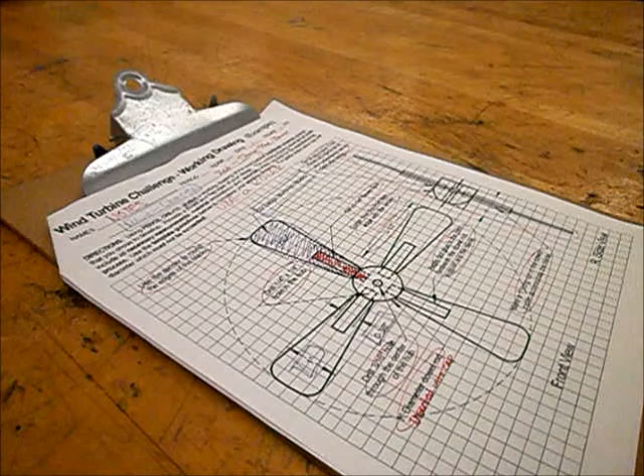Hi class. When we left off, we were learning about wind turbines, and we left off designing our own wind turbine rotor. So today I'm going to take the time to show you guys how to build the one that was shown to you in the example. Let's get started.

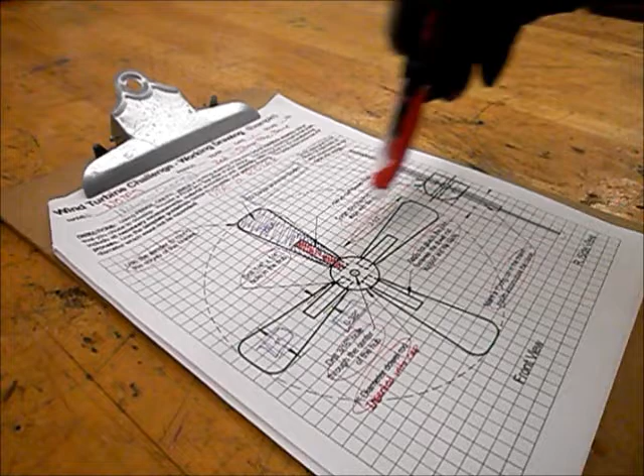Alright, so we're going to learn how to turn these two materials into this hub. It's going to have a center hole, which is 3/16 inch in diameter, and the side holes, which are 1/4 inch in diameter, which will serve to hold the rotor blades.

So here we go. Grab your PVC cap and your dowel rod, probably about this size. You might be able to get a longer one, but enough so that you can grab hold of it. Take the cap on top, right there, and grab a mallet and hammer it in. Get a couple nice hard hits, making sure it doesn't come off. It's nice and tight and fit in there.

Okay, once you got that, we're going to move on to the belt sander.

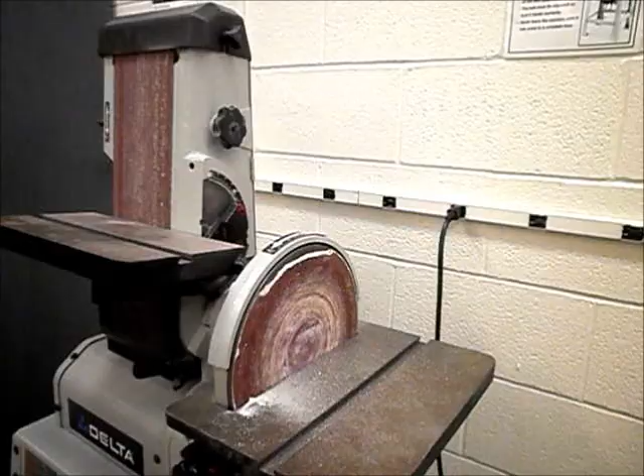Alright, so we're now here at the disc sander. The disc sander has two pieces, the belt and the disc, and there's a label on the side which tells you which way it rotates. The disc rotates counterclockwise, which means you want everything you're sanding to be on the left side. That way, when you're sanding, things are pushed down towards the table. If you put them on the other side, it might cause the disc to lift up the material and hit you in your body, so you want none of that happening.

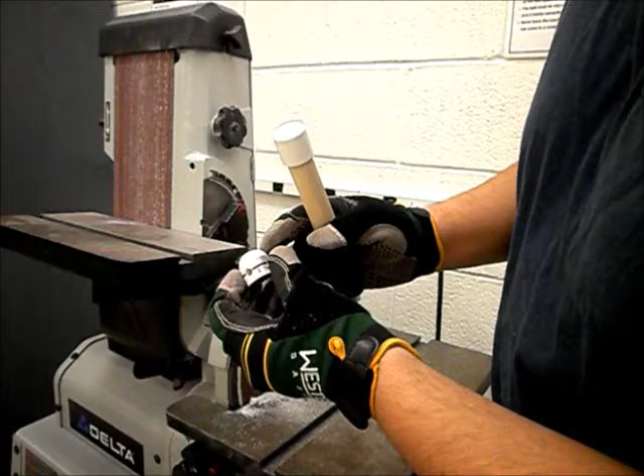I highly recommend using the disc sander instead of the belt sander, because you'll get a nice finish on the hub. So what we're trying to do here is sand all these edges and make a nice dome shape. That way it's a lot more aerodynamic. See that? So we're going from this to this on my left hand.

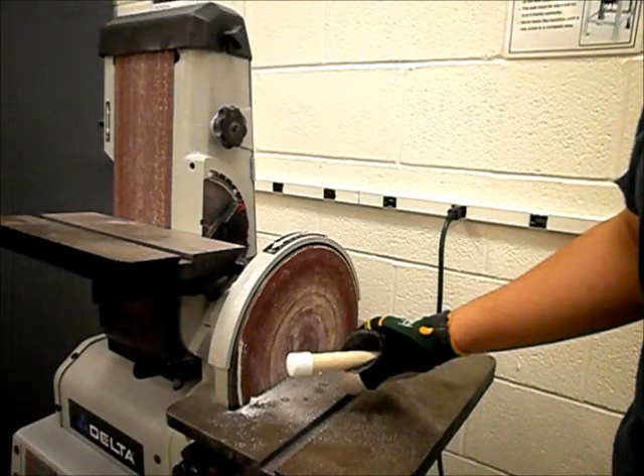Okay, I'm going to show you a quick demonstration of how to do that. Let me just get the camera to the right focus, and we'll continue on from there.

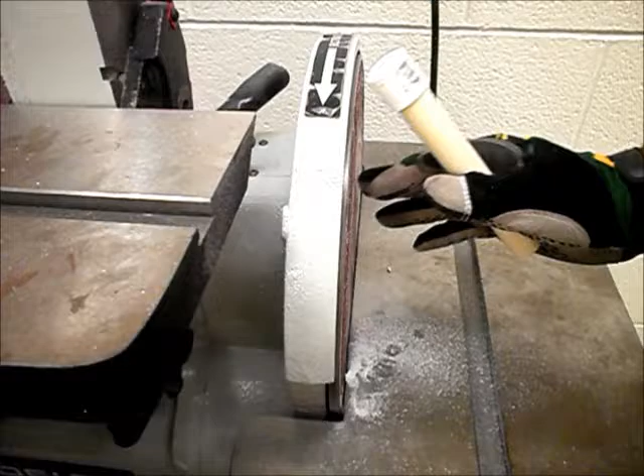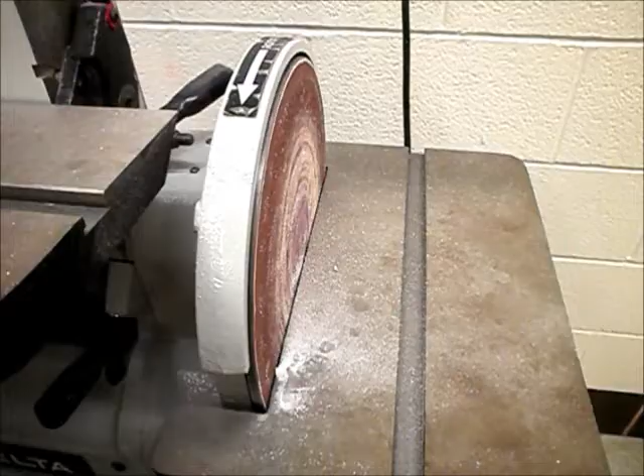Like I mentioned before, there are two places you can sand things: the disc and the belt. There's the belt, and here's the disc. There should only be one person at the station, nobody else, just you, the one operating the machine. If you're working with a buddy, make sure they're standing right behind you, watching what you're doing, so they're checking your safety rules and procedures. If you forget any of the safety rules and procedures we talked about, you may also find them right here, listed on each side of each machine.

Remember to wear your safety glasses, make sure you're not wearing any jewelry, and your hair's tied back. Again, we've gone over the safety procedures, and we'll do it again in class. But let's move on to this tutorial.

So going back to this, what you want to do is turn on the machine, let it get up to speed, and once it gets up to speed, you're going to hold it and twirl it around until you get a nice dome shape. Let me just show you guys.

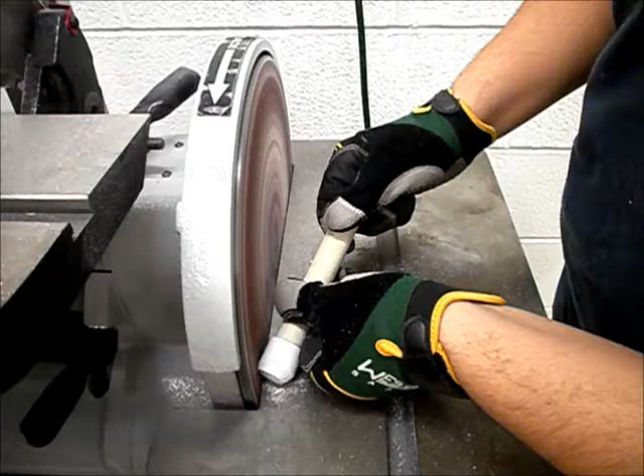Try not to push too hard, okay? Otherwise you'll tear away too much material. Yeah, it's coming along pretty nice, okay?

Here we are. The top, we're going to have a nice flat surface on it, so we're going to try to make that.

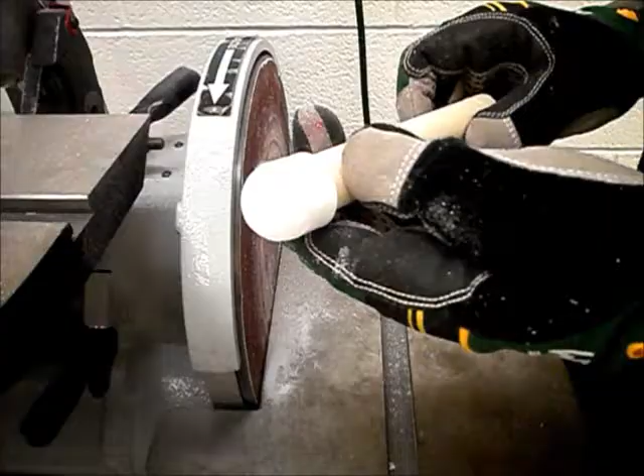Wait till the machine stops before you leave. Alright, and that's it, look at that. It's nice and even. Try not to shove it in there, otherwise you'll tear away all the PVC plastic out of that, and you don't want any of that, okay? So that's it for the disc sander.

Now we're going to go and remove the cap from the dowel rod, so that all we have is this short piece right here, okay? Alright, let's move on.

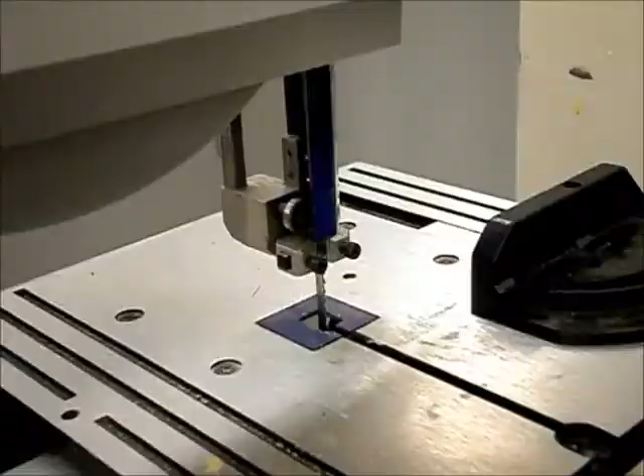Alright, so I understand a lot of you guys haven't used this machine before, but this is called a bandsaw. So there's the switch, and right there is the blade.

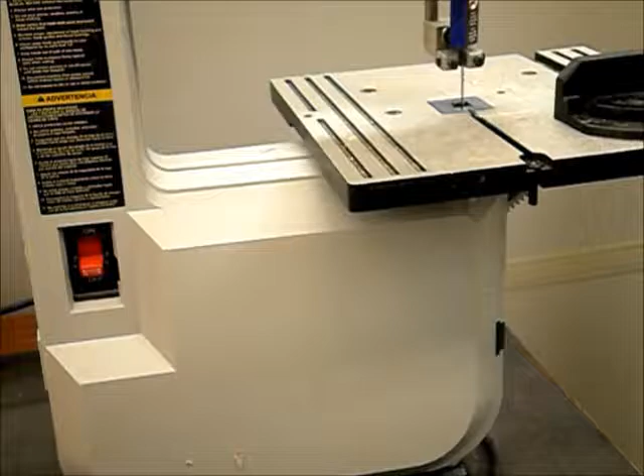Okay, let me open it up for you guys so you can see it. This is something you guys shouldn't do - I should do it in case it ever breaks or needs replacement.

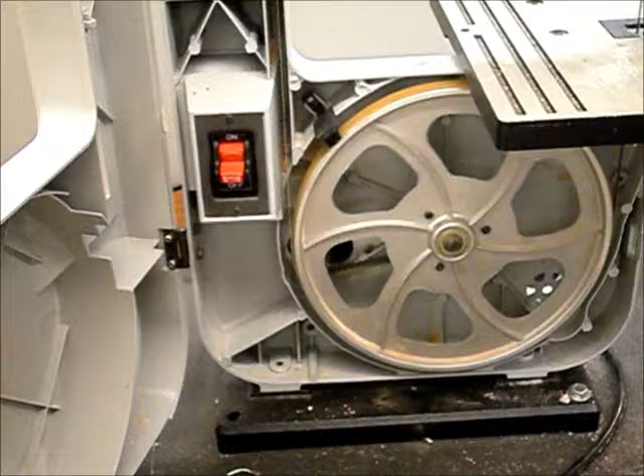There's the inside of a bandsaw. It's called a bandsaw because it has a band inside that has teeth. It's got a set of teeth that cut material and it rotates in a clockwise direction. I'll talk more about that in class, or one of the other teachers will explain the functioning and cool stuff about the bandsaw.

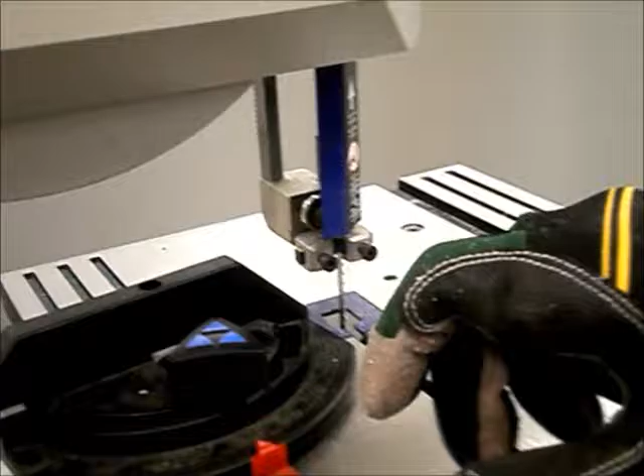This machine will already be set up for you guys, so you don't have to tweak it or do anything. All you got to do is understand that this is the slider, this piece right here. Why is it called a slider? Simply put, there's a rail right here. You put the slider on it, and look at that, it just slides along.

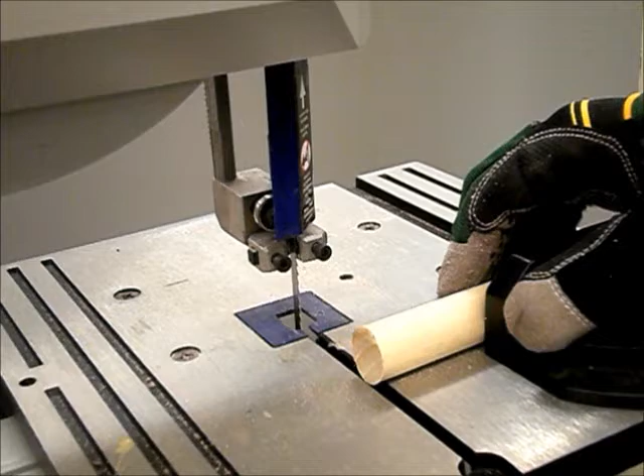So here's how this works. You're going to put your piece of material - this is just a practice one so you guys can see how it works. The piece of material just sits against the guide. Let me see if we can get a better shot there. See that? My fingers hold it, and now I can slide in and out accordingly so that the piece touches the blade when it's turned on and it cuts it.

Let's see, I'm gonna turn it on. That's the sound it's gonna make before you start cutting. So here we go. You can slide in and out this way, but you're always holding on to the piece up against the slide. Let it stop before you remove any of those pieces. And there we go, and there you have it.

Okay, here's the cap that we made before - well, the assembly, I should say. I haven't really cut out the hub yet.

But what we want to do here is go to the bandsaw. I'm going to try to line it up as much as possible, the cap to the blade - as much as possible, but not too close, okay? Sometimes the blade can cut more than we need to and not exactly at the right spot. But we want to cut at the neck.

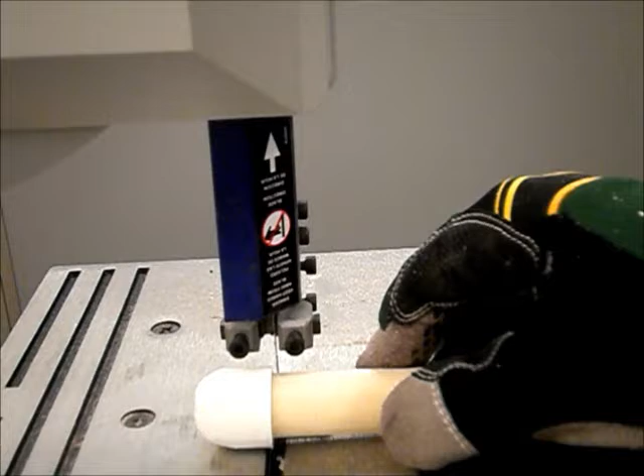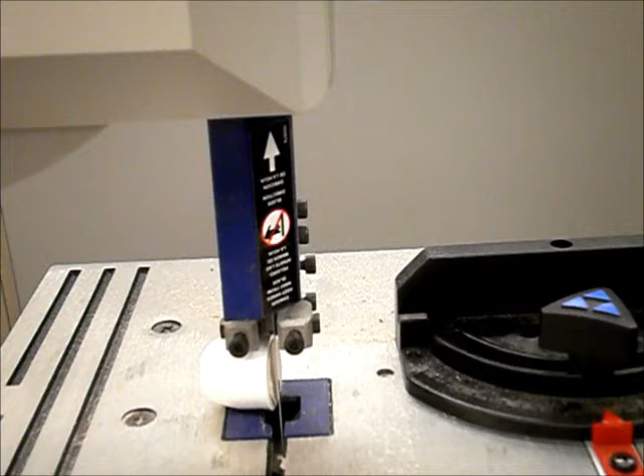So here we go, I'm going to pull aside, start it up, slowly move it, okay? Alright, so if you did it right, all you should have is this guy right here. See that? I didn't cut too much of it, it's just at the right spot. I didn't cut any of the PVC plastic.

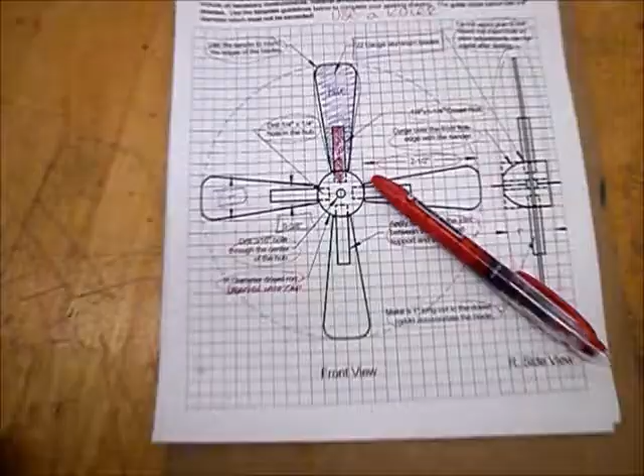Alright guys, so here's the next step. We're going to make marks so that we know where to drill the holes. According to your drawings, we had the center hole, which is 3/16 of an inch. We need to mark the center of our hub right in the middle.

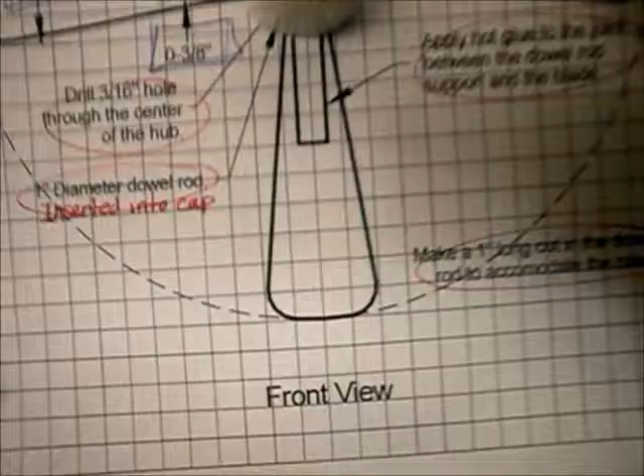It's going to be kind of hard to do while holding a camera, but I'm going to try. Okay, I'm going to make a little dot. I'm going to do that - double check. Just a small dot in the center.

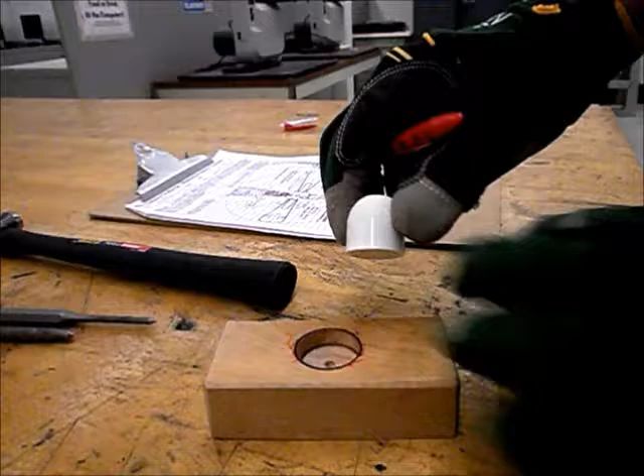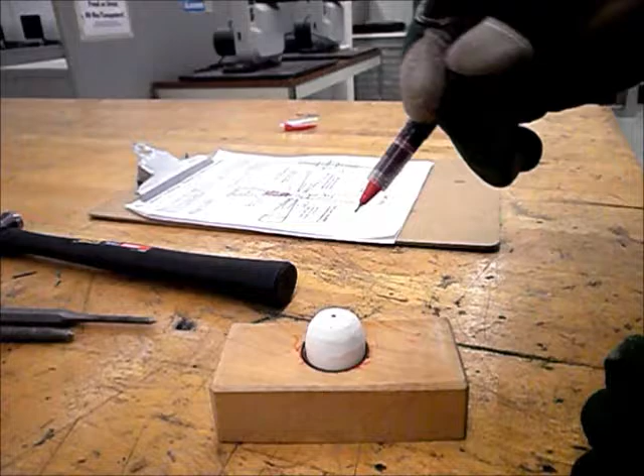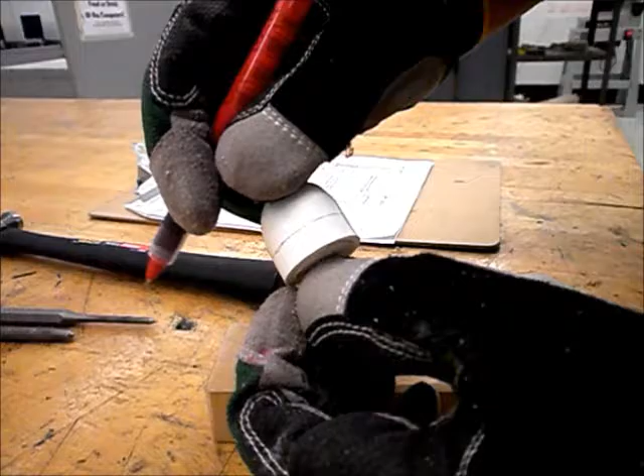Here I have this wooden piece that is pre-made, courtesy of Mr. Nelson, and all we got to do is take our cap. It's been sanded down so that way it lays nice and flat inside here. See that? I'm going to put the pen right up against there, and that's going to mark the center line where my 1/4 inch holes are going to go. See that? Line goes all the way along that.

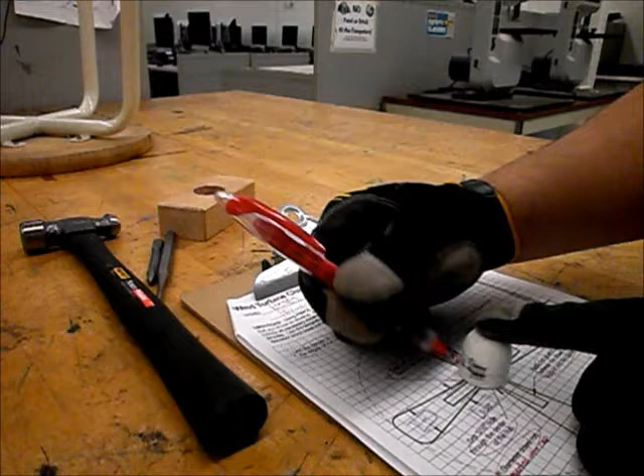So I marked the center line, so you remember. And now we also need to mark where we're going to make the center marks for the side holes. Come to your template - obviously mine, the one I'm making, is a 4-blade, so it's really simple to do. I just got to lay this guy on top of the template, nice and center. Grab my marker, make a vertical line, matching up to that. Vertical line here, vertical line on this side, and on the back side.

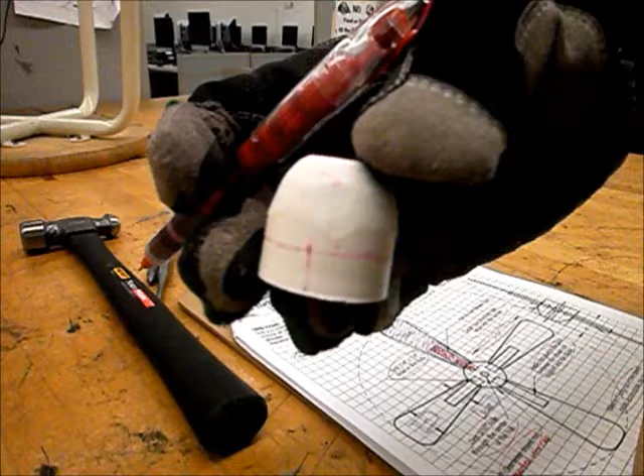For those of you who are making 3 blades and 5 blades, I will have a template ready for you, so that you guys can actually just mark it and it's ready to go. What I might even have is clean out these blocks, and I will have stickers with arrows pointing to where you should mark the little tick marks, so that you know where to center the hole. So little tick mark - yeah, so all you'll have to do is go like this, make your little circle all the way around, and just mark all your center holes.

Okay, so now that it's marked, we're going to make some pilot holes that will help guide the drill bit into it so we can make the holes.

Okay, so I'm going to put the dowel pin right at the center, and I believe that's the center that I marked. It's a little smudged. Actually, I'll use the short dowel pin. It's hard to match it up. Get a couple hits with the hammer, and it should make a little dent in there that's right at the center. I'm going to use this one just to make sure.

Alright, be careful not to rub the marks, otherwise you'll smudge it and you're not going to get the perfect center marks. This is a little tough, you're going to have to hold it. Make a little...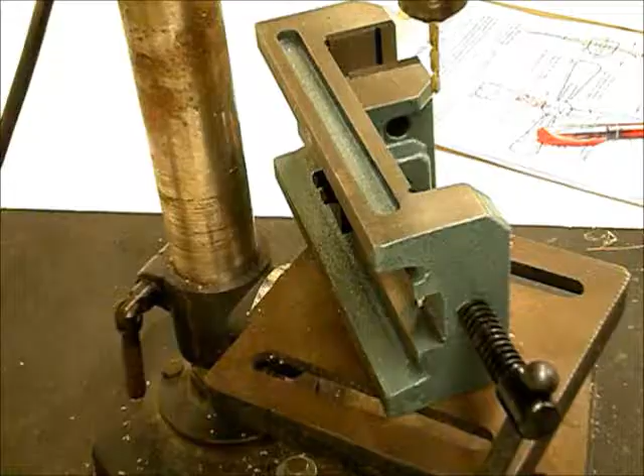Alright, so here we are at the drill press. Now again, if you don't know what the safety rules are for the drill presses, we reviewed them in class, but also if you forget, they're on each side of the machine. Make sure your safety glasses are on, make sure no one's in your work area. If you're working with a partner, make sure they stand behind you and cause no distractions to you, and that they're checking for your safety and their safety as well, so you're checking out for each other.

So here we are. What we have here is a table vise. If you turn it clockwise, it closes down, see it moving. If you turn it counterclockwise, it opens. Clockwise closes. So as the old saying goes, lefty loosey, righty tighty.

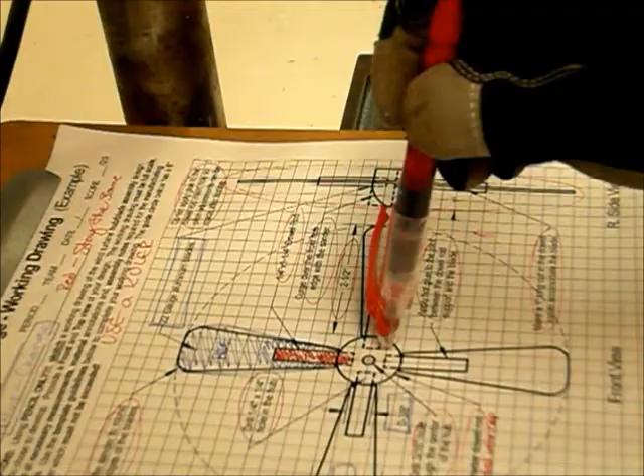This drill press is already set up for you, so you guys can make the center hole. That's 3/16 of an inch. It's marked down for you in your drawing.

So here we go. What we got to do is take this guy, take the cap, and we're gonna turn the vise right. Make sure that this guy, the cap, is touching up, right up against the wall of the vise.

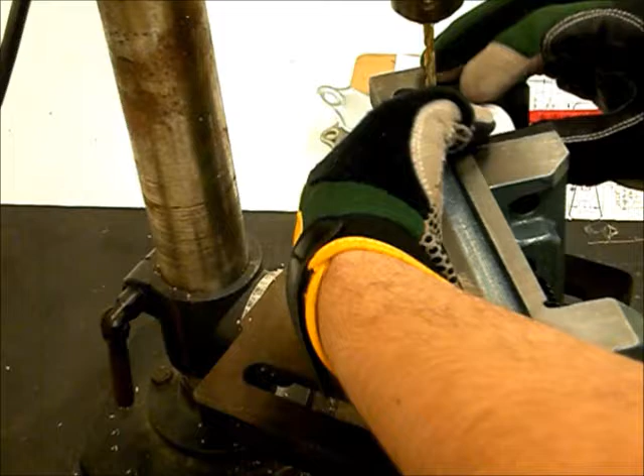That's about right, and squeeze down kind of nice and tight. You can have a teacher check to make sure it looks right and nice and straight, because some people like to put it crooked. So like this, that's a no-go. Make sure that little dot is facing straight out, as straight as possible. Okay, close it.

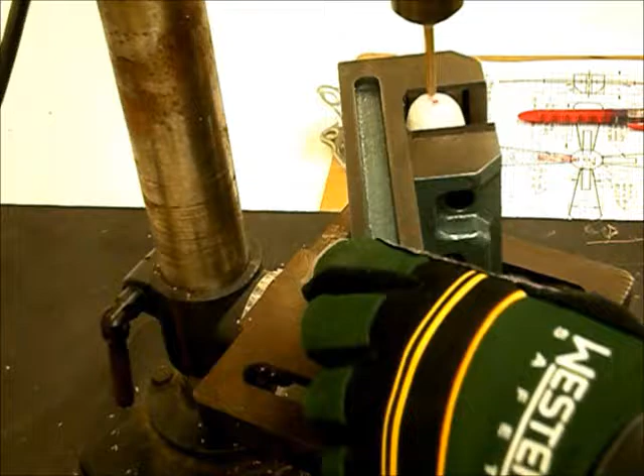Alright, I'm gonna turn it on, and watch carefully what I do, because I gotta make sure that I bring this down and up. It's gonna have to go all the way through. Just doing that motion slowly. This ensures we get a straight hole through the whole cap.

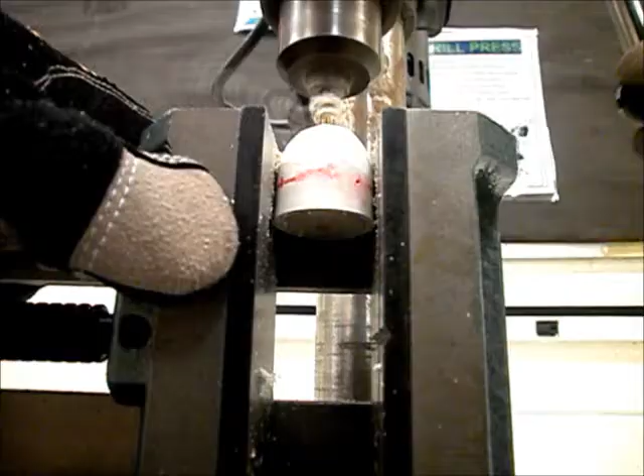Notice I'm holding the table vise correctly all the way through. Wait for the machine to stop. Clean it up a little bit. Look at that, right down the center.

Looks pretty good. Alright, so now let's move on to making the 1/4 inch holes on the sides.

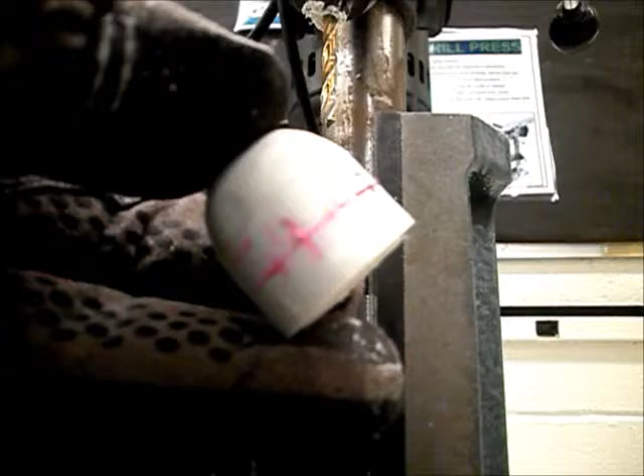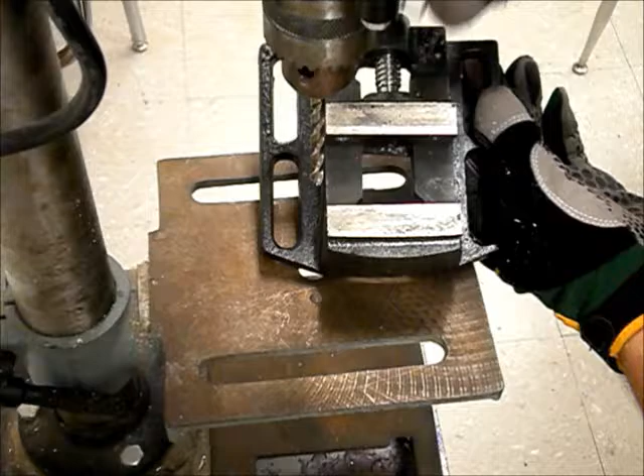Alright, so here we are making the 1/4 inch holes. Make sure the workspace is nice and clean. What I'm putting on here is a table vise, different one from the other one. This one is smaller, to lay the cap nice and flat up against this flat piece right there. Nowhere else, not in the middle, not on this side, just one of these flat sides.

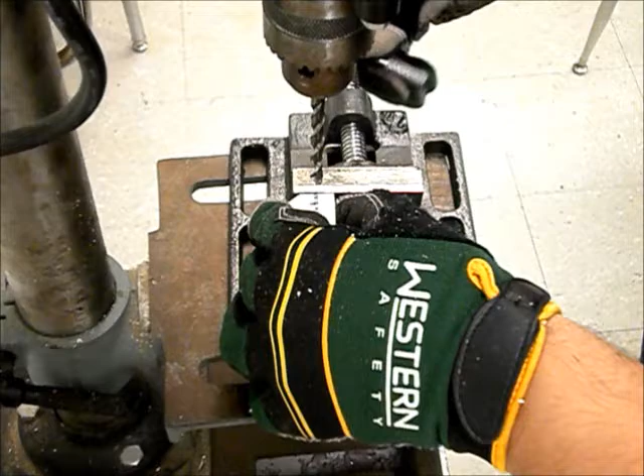The way this table vise works is the same way as the big one. Lefty loosey, righty tighty. Watch your fingers as you're closing it down. You got to make sure that the first of the marks is facing up. Alright, that's nice and tight.

And we're going to try to line it up. Make sure that when you hold down the table vise, you're holding it down on the table, not pushing it sideways, otherwise it'll slide and you'll bend the drill bit, and also you won't get the right hole. Line it up.

And how deep should you go? Well, it's a 1/4 inch, but I already set it up for you, so you only have to go down a certain depth. These little nuts will actually stop the drill press from going any farther than it's supposed to. So it's already at the right depth, you don't have to go any more, any less.

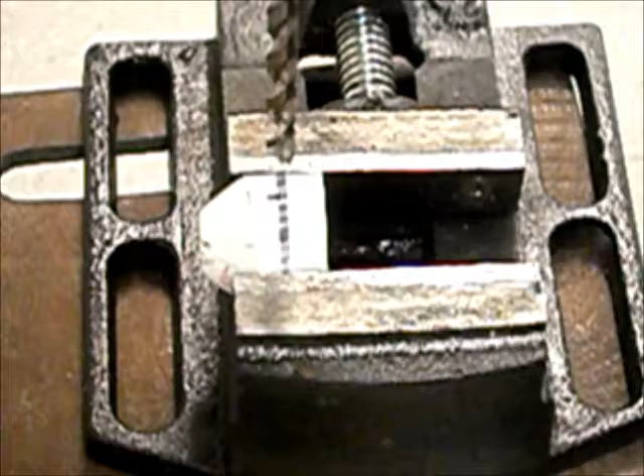So here we are, I'm going to line it up. And we're going to turn it on and let it go. Nice and easy. Shut it off, wait for it to stop. Loosen it up, bring it down to the next one.

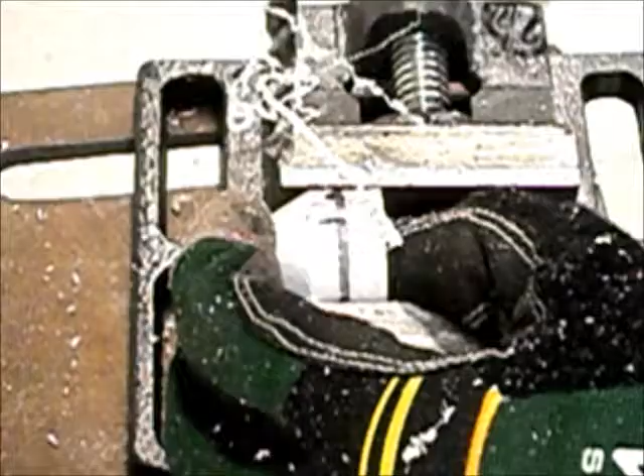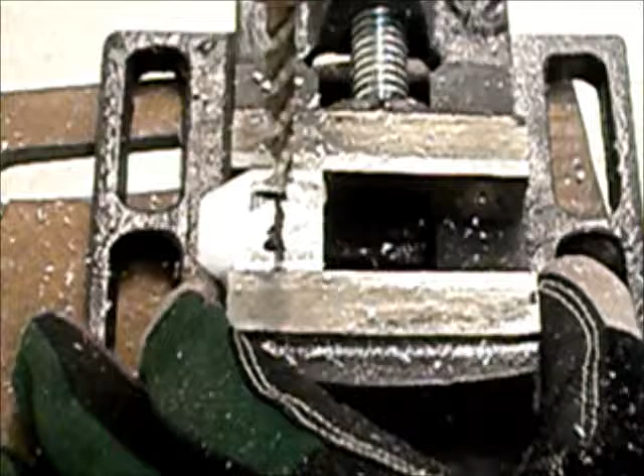Work at a comfortable speed. Don't rush it, otherwise you'll make mistakes. So slow down. There it is.

Alright, loosen it up. Clean it up. And there you have your hub, it's all done.

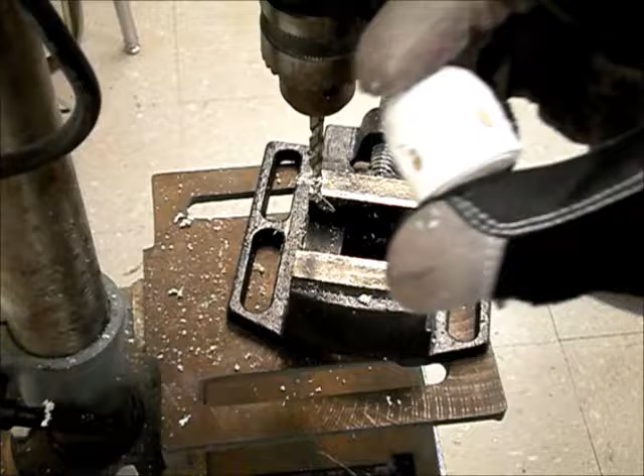Now we can get started on making all the blades and the pegs for it. Nicely centered, everything's done. Alright, check that off your list, and let's move on to the next part.